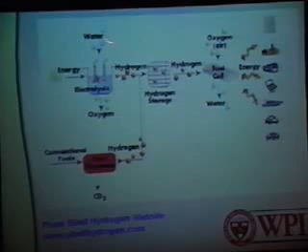This development will be through technology and innovation, and he will provide some funding for doing that. Now, hydrogen, as Provost Durgin said, well, it's easy: you take water, put energy in, and you get hydrogen and oxygen, then you store the hydrogen and go to a fuel cell for energy. However, this is really a difficult 'easy' thing to do, and it's very expensive.

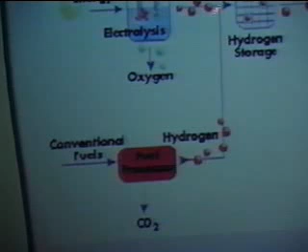Currently, all hydrogen is produced through fossil fuel. So if we talk about the current hydrogen economy, we still cannot get rid of the greenhouse CO2 problem. Let's spend a little more time talking about this fuel processor to make hydrogen. Once you make the hydrogen, you can store it — that's another big problem, how you store hydrogen — or you can feed it directly to the fuel cell to generate energy.

When you go to the hydrogen economy, now you have no carbon. As Provost Durgin said, you combine hydrogen with oxygen to give you water. That's the byproduct of your energy — this is really an environmentally benign product.

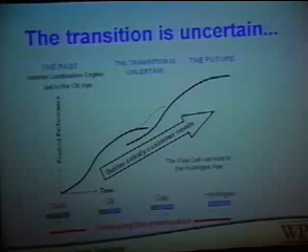Currently we are in this transition stage, and the transition is very uncertain, simply because we have to find a good way to make hydrogen — an economic way and also an efficient way to do that. Let's look at the next slide.

If you look at water, the best way to do that is to take solar energy to do electrolysis of water — that's the best way. But that's really a long way to go. In this case the hydrogen to carbon ratio is 1:0. There was also a suggestion to use nuclear energy for electrolysis of water, but as we all know, there are other problems associated with that. Again, this is the best way to do it, but it's not the most economic way, and it doesn't produce any greenhouse effect.

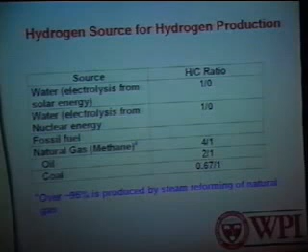Now the next thing is fossil fuel. Natural gas, as I said before, is 4:1. Currently, most hydrogen used in the chemical or petrochemical industry is produced through natural gas, what we call steam reforming of natural gas, and I'll talk a little more about that in a few minutes.

This reaction is actually the trouble for the whole system, because it's generally controlled by thermodynamic equilibrium. So no matter what you do, at one temperature you can only convert a certain amount of methane because of that equilibrium. What we want to do is increase the conversion — what people used to call shifting the equilibrium. Thermodynamics itself can't be shifted, but you can increase the conversion by doing certain things, and that's what we're going to talk about next.

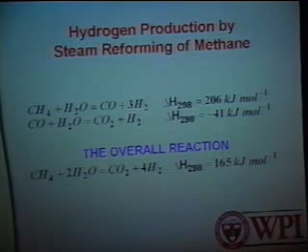Now what we are doing at WPI is using a certain membrane we developed which can be used to make this hydrogen. We call it the membrane reactor, where we replace this whole 5-unit operation with a single reformer. This means you save all this process here, and equipment-wise you are cheaper, and also operation-wise you have less units to worry about, so it becomes a more economical and efficient way of doing it.

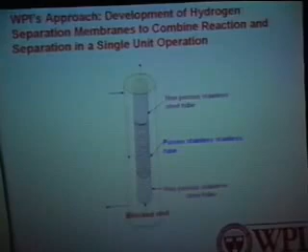So what is a membrane? Some of you may not be familiar with membranes. Here I have the membrane for you to see, and this is two of them. This one is what we call support, and we put our membrane on this support here, and this one has a membrane inside. When we finish, if you want to come up to look at that, you're welcome to come out and look.

If you look at that, this is the tube I show here. This end is a non-porous stainless steel tube, and that's also a non-porous stainless steel tube. In the middle portion is porous stainless steel. In simple terms, the stainless steel tube in the middle is porous like a sponge.

Now outside the sponge, we're going to put a layer on top of that. We put a palladium or palladium alloy membrane, and I'll explain why we put that on.

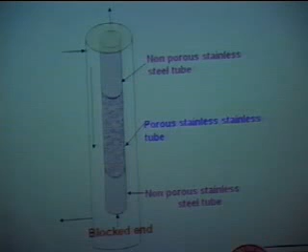Now in this unit here, generally what you do is have a gas mixture come in here, and gas mixture goes out here, and hydrogen goes out here. So what happens is you have the mixture of gas coming in, hydrogen going through here. This membrane only allows hydrogen to go through, so pure hydrogen goes through here and out here. You can collect that, go to storage, or go direct to a fuel cell.

Now that's a very simple process. At the end, I'll show you a comparison between this process versus currently commercially available units.

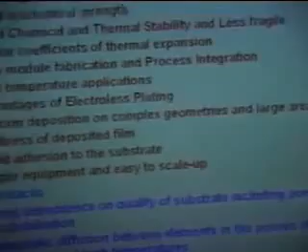Well, what we do here is look at that. We say, we're going to put a very thin palladium or palladium alloy on here. And we use the advantage of a metal support, which means it's very easy to connect to different parts of the process. And also they have very good mechanical strength, of course chemical and thermal stability, and are not very fragile.

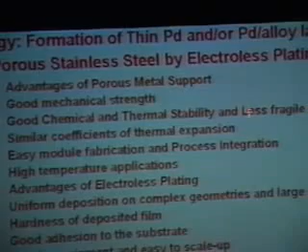And because you have two metals put together, when you run these reactions at very high temperature, you need a similar coefficient of thermal expansion. And we can easily form the module and easily integrate it into the process.

We do electroless plating. What is electroless plating? We all know electroplating, where you pass electricity to place some elements on top of a support or surface. Electroless plating is where we do not use any electricity to plate. Sometimes it's called chemical plating. What it means is we use certain kinds of chemicals. We activate the surface first, and then we seed some of the nuclei on the surface, and then we carry out the reaction, which becomes autocatalytic. The reaction takes place by itself and coats the material.

That, again, is really easy to do, and we can coat it very uniformly. When you look at the sample, you can see that. And the film we produce is very hard and also has very good adhesion between the coated film and the support here. And it's very simple equipment for doing that.

Here's the process we do, I'm not going to go through all of it, just to show you this process. We have to clean the surface, sensitize the surface, seed some nuclei, and then plate it. We have to do it several times to get the membrane we need.

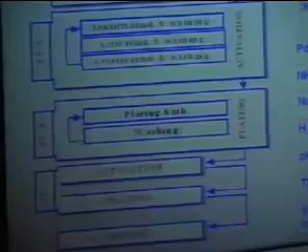The important part is this one, the unique pattern in this procedure. Because we are making two metals contact together, at high temperature when two metals get together, one metal will diffuse into the other. So to avoid that, we create a layer as a diffusion barrier, so the metal elements will not go into the membrane and deteriorate it. This is a unique process.

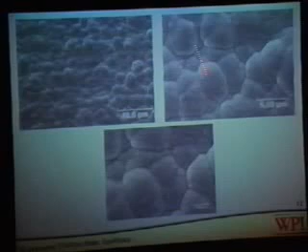If we look at this, this is the surface of the membrane, this is the support, and this is the palladium on the surface here. This is the cross-section of the membrane. If you look at the next one, you see the surface of the membrane - these are clusters of palladium at different magnifications. At the highest magnification, you see clusters, and also inside the cluster are small grains. Hydrogen will diffuse through these layers of metal.

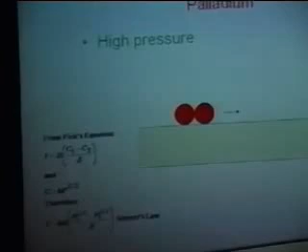Here I'll show you that. This is the palladium membrane I showed before. We have the high pressure side here, low pressure side here. When hydrogen comes over, it comes to the surface and decomposes, dissociating into two atoms. Hydrogen molecules come to the surface, dissociate into two atoms, move through the palladium layer, go to the other side of the membrane, recombine into hydrogen molecules, and then desorb from the membrane. This is the process taking place.

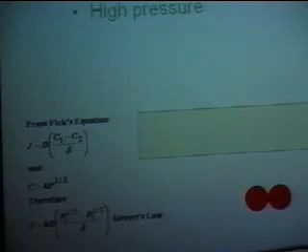When you have hydrogen, it will adsorb on the surface, dissociate on the surface, go through this membrane, and reassociate to give you hydrogen gas here.

Now if you go through the analysis, you get what we call the flux, essentially how much hydrogen can go through per unit area of the membrane. It's proportional to the difference of the square roots of the pressures, and inversely proportional to the thickness of the membrane. So we want to make the membrane as thin as possible, but still dense, so it will not allow any other gas to go through.

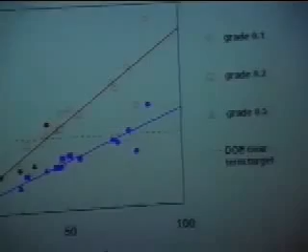This is DOE's near-term target. Our technology right now already exceeds the current DOE near-term target. That's why this technology is quite unique - that's what Provost Durgin mentioned. It's very unique in the sense that we can satisfy, in fact exceed, the DOE near-term target for hydrogen production.

Now just to show you pictures, we can make a small one like this, about 10 inches, about 1 inch diameter, and this one about 12 inches. The next one we'll show you is this one.

You can see these are two of my associates - they all have to be 6 feet tall or so because it's so long here. And one of my friends said it's not that the membrane is long, it's that Professor Ma is short.

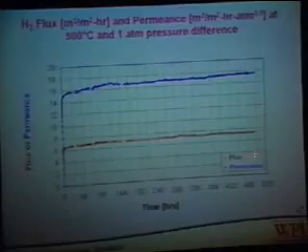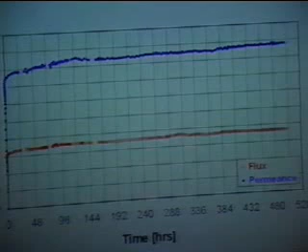One of the things we have to worry about is how stable this type of membrane is under high temperature. Here we show one of the membranes we made - the flux here as a function of time, you can see this is about 500 hours. We ran that for 500 hours. Certain membranes we run over several thousand hours, because industrially you need at least a year or two of life to make it industrially applicable - simply, you need that to make it an economical process.

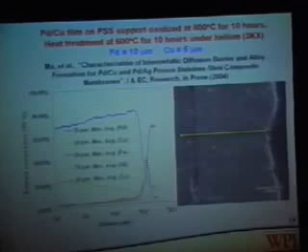Now, as I said, we look at this type of membrane. I'll show you one more - alloy membranes, this is palladium and copper alloy. Why palladium and copper? Certain fossil fuels contain sulfur, and sulfur is not very good for palladium, but palladium-copper alloy can resist the sulfur. So we also make this type of membrane, as you can see.

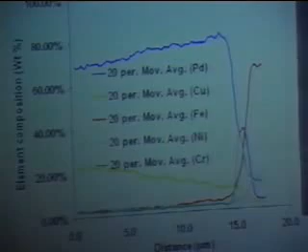We also need to be concerned about, as I said before, intermetallic diffusion - in other words, material elements in the support diffusing into the membrane itself. We have EDX data showing there's no element from the support going into the membrane, which means that this barrier layer we made, or the patent we hold on the barrier layer, is effective in avoiding this type of problem.

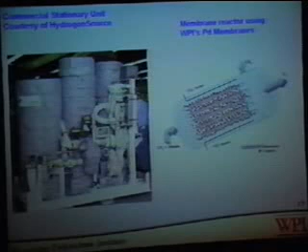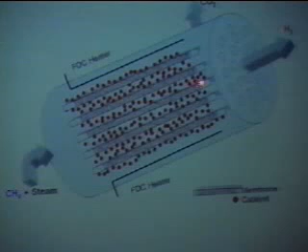Now that's what I want to show you - this is what we envision as our reformer. This reformer has the membrane tube I described before, and these are catalysts. The steam reforming process needs a catalytic reaction taking place. So if you have methane and steam passing through here, and this is a heater.

The heater here is called a flameless distributed combustion. We have a very extensive program with Shell Exploration and Production International, Inc. Shell International, part of Shell Hydrogen, has developed a technology where you can directly put heat into the system, because this type of reaction requires high temperature, 500 degrees or above, and it's very difficult to put the heat in.

If you put the heat from outside, then you have to heat very hot so that the material for construction of these units becomes very expensive. By doing this type of heating, you directly go into the system, and the surface temperature now is around 600 degrees centigrade rather than, say, 1,000 degrees or over.

Now if you look at the methane and steam going in here, the CO2 goes out here, and hydrogen comes out here. One of the advantages of this system is that this reaction is run at high pressure, so the CO2 stays here - this is high pressure CO2.

Now here I have a unit from Hydrogen Source. This is a 5 kilowatt unit of produced hydrogen, enough for a 5 kilowatt fuel cell. If you look at that - 1, 2, 3, and one more, 4. In this process they use catalytic partial oxidation units.

So they have 4 units here, but this one does not produce pure hydrogen, so they don't have a separator - you have 5 units here. If you use this one, then all you need is this one unit to replace 1, 2, 3, 4 here. So that's really the advantage of this process we're talking about - you can do it with a simple unit.

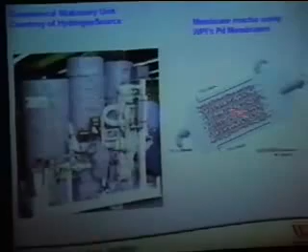And also at the same time you get the benefit of being able to put the CO2 away, and you come out with hydrogen almost 99 to 99.9% purity. So this is the process we're talking about, and we hope it will be available in the near future.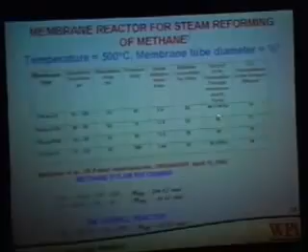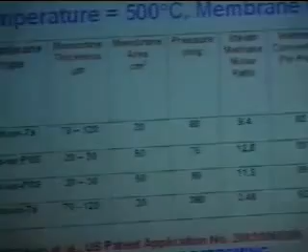Now here's some data run by Shell, from one of their patent applications, using our membrane, showing how high the conversion and how high the purity of hydrogen you can get. At 500 degrees, you can convert 93 to 99% of methane, which means the conversion itself is very, very high here. Again, that's the steam reforming reaction.

Now let me conclude my presentation. Electrolysis of water certainly is the cleanest way for hydrogen production; however, technical and economical challenges remain to be resolved. The transition from fossil fuel to hydrogen economy is uncertain, and considerable R&D is still required, including development of palladium membrane reactors for more efficient, economical hydrogen production with simultaneous CO2 sequestration.

Now that's the important part of this process. Not only can we produce pure hydrogen, at the same time we can solve part of the CO2 problem. I say part of it because we still produce CO2, but we have a relatively easier way to put the CO2 away. So this will provide a cleaner way for near-term hydrogen production.

I believe conservation is probably one of the best ways to solve our long-term energy problems, to make us self-sufficient, and to keep our environment clean.

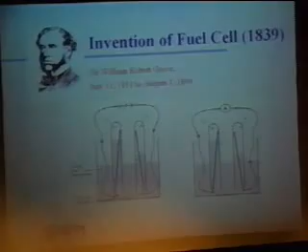If someone can turn on the light at that table, as I go along, I'm going to give a very basic introduction to fuel cells. I'm not going to go into a lot of technical details, but I do want to show those of you who are uninitiated in fuel cells how it works. So the first thing I'm going to demonstrate is electrolysis.

Here is a beaker in which there are two electrodes, and these electrodes, I don't know if you can see them or not, but these foils are platinum. What I'm going to do is, it's already connected to a cell, and I'm going to put some water in this to see if there is any electrolysis.

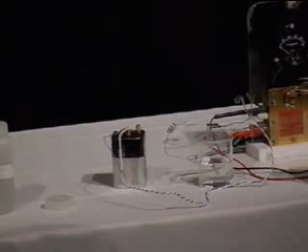Well, I don't know if you can see or not, but you see that there are no bubbles. So what do you think is missing in this? Electrolyte, yeah, that's exactly right. What is missing is that you need an electrolyte, and in this case there's a very dilute sulfuric acid solution, which I'm going to add to it to see if the electrolysis begins. Nothing.

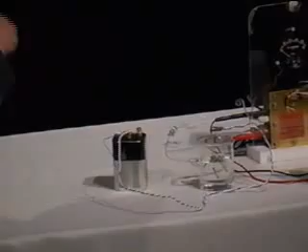So I've added a little bit of sulfuric acid, and I don't know if you can see the electrodes, but you can see the bubbles. I think that illustrates the basic ingredients of a fuel cell. You need two electrodes, an anode and a cathode. This is actually just the reverse process of a fuel cell — you're using electricity to produce hydrogen and oxygen, whereas in a fuel cell you use the reverse process. You might be able to see there are bubbles of hydrogen and oxygen on the electrodes.

I'll fast forward to the modern fuel cell. In the modern fuel cell, you have an electrolyte, which is the membrane, so there is no liquid electrolyte. This whole thing is a solid state device, and I'll show you an example of that in a minute. The hydrogen comes in — this is the hydrogen molecule that comes in. There is platinum dispersed on the surface of the membrane in a very, very distributed form, so that you can utilize the platinum very effectively.

The hydrogen molecule breaks up into hydrogen atoms, and it strips off the electron because the electrolyte does not allow the electrons to go through. The electrons are forbidden to go through the membrane, so they go through the external circuit where they perform some useful work. They arrive at the cathode, where they meet up with oxygen. The oxygen molecule also dissociates into oxygen atoms, and it combines with two hydrogen atoms and two electrons to form water. So water is the only product.

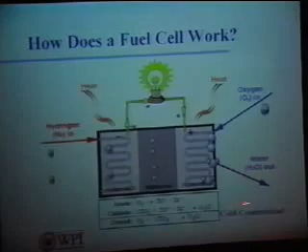So this is the reaction that goes on at the anode, where a hydrogen molecule forms two protons and two electrons. And at the cathode, you have half a molecule of oxygen combining with two protons that come through and two electrons that come through the outer circuit to form water.

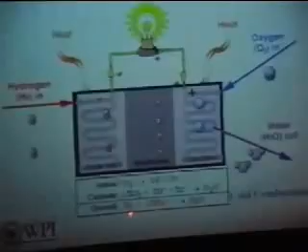So if you look at the overall reaction, which is just the combustion of hydrogen, because this happens at a low temperature, around 80 degrees or so, it's called cold combustion, because the overall reaction is the same as combustion, and I'll give you another demonstration of that. You combine hydrogen and oxygen and you form water, but you don't do it at high temperature.

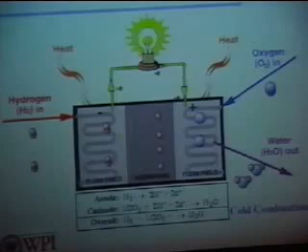Let me just show you the second part of the demonstration. So I have here a tank of hydrogen, compressed hydrogen, and a tank of oxygen. You don't need a tank of oxygen, you can use air. What I'm going to do is, I've already opened the valves and I've been bypassing it, so I'm going to mix the two, and it's going to come out of this nozzle here.

To show that there is a gas flow, I will. There's a soap solution here that makes a bubble. Can you see the bubble? Now I'd like you to look at the bubble. It has hydrogen and oxygen in stoichiometric proportion, but nothing is happening. It's not combining to form water.

So what is missing? We saw in this example that what was missing was the electrolyte. What's missing in this case? Activation, yeah. So you require some energy to activate it, and that energy can be provided either as a spark or as a catalyst. The catalyst does not provide the energy, but it lowers the activation energy.

So let's see what happens when I use a catalyst. I'm going to make another bubble.

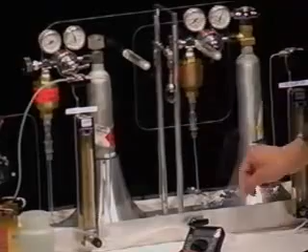Now here is platinum catalyst. It's not a foil, it's dispersed. It's platinum black, so it's a powder of platinum. There is $100 worth of platinum here, so I want to be careful. But what I'll do is take a Q-tip and pick up some platinum powder, and apply it to this bubble. So you see that. That's the other ingredient that was missing, the catalyst.

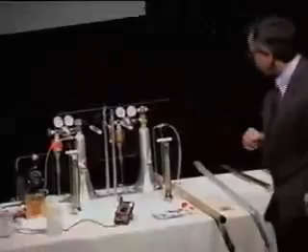I'm going to shut this off. Actually, I have another part of it. Before I go on, so we saw in this that you need an electrolyte, you need platinum, and of course the platinum is extremely expensive, and you want to disperse it as finely as you can. That is one of the things that chemical engineers have accomplished, that we can disperse this catalyst in such a fine way that you use very little of it. An example of that is the catalytic converter in an automobile that costs only a couple hundred dollars, but it's based on platinum, and so it has very little platinum in it.

Now the second part of this demonstration is the fuel cell. The fuel cell, there's a single cell, just like a AA battery, but it looks like this. I don't know if you can see this very well or not. This is the membrane, the clear plastic part that looks like a transparency, and these are the electrodes. Between the electrode and the membrane is a very fine layer of platinum, which is the catalyst. What you do is put it in the hardware so that you flow hydrogen on one side and oxygen on the other, and it begins to produce current.

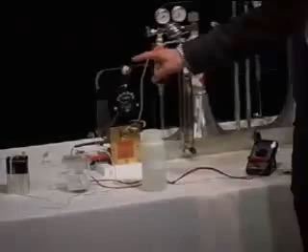So because it's a single cell, it produces less than a volt. All it can do is power this toy motor. So you watch this needle, if you can, as I turn the hydrogen on towards the fuel cell. It's as simple as that. You turn on hydrogen and it begins to produce electricity. And I haven't even turned on oxygen yet. It stopped for some reason.

And if you could read the current, it's roughly 100 milliamps and about 0.8 volts. Now, what is impressive about this is not the voltage, which is, of course, like a single cell, but the current. This little device with the active area of 5 centimeters square can produce up to 5 amps of current. And so it has a very high energy density, and that's one of the attractive things about fuel cells.

So this is all it is. This is the heart of the fuel cell. And this is a single cell. What you can do is stack this together and produce any voltage or any current density that you want. I'm going to turn this off, but you'll see that this is going to continue to turn so long as there is some hydrogen in the lines. At the end of the presentation I'm going to turn this off, but let me go back to the rest of my slides.

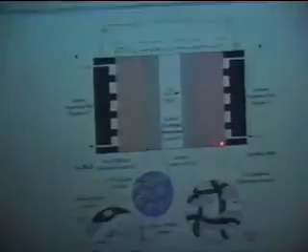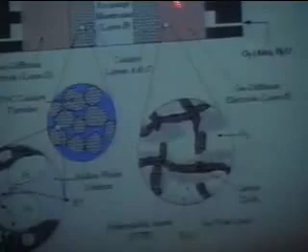This is the membrane, the thin plastic that I showed you. This is the catalyst layer, and that's the electrode. Because you're producing water here and you want oxygen to go through, you want the water to ooze out quickly. You don't want water to block this electrode. So you make it hydrophobic with Teflon so that oxygen can go through. But you're also collecting current, so this electrode is made from carbon cloth.

The catalyst is dispersed as 5 to 10 nanometer particles on carbon, and you have Nafion solution. This is Nafion, this membrane. The protons produced here must find their way here, so there is Nafion solution here as well, shown here. But you also need hydrogen to get to the platinum catalyst. This is the carbon particle support, and you have some Teflon here as well to make it somewhat hydrophobic. So the construction is really quite sophisticated.

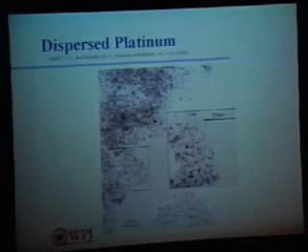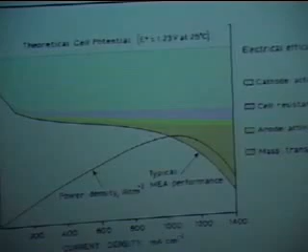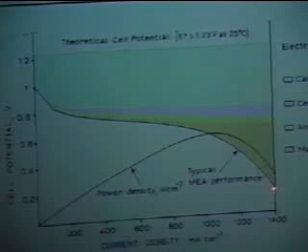The typical performance curve: as I said, the open circuit voltage is roughly 1 volt. In fact, the thermodynamic voltage is in excess of 1.2 volts, but the oxygen reaction is so inefficient that there's a large voltage drop here. This is the current density in milliamps per centimeter square. You can easily go up to 1 amp per centimeter square at a voltage of roughly 0.7 volts. So the largest efficiency drop is at the cathode, but there is also resistance of the cell and the anode reaction. The overall performance characteristic of voltage versus current density is given by this curve.

If you multiply the voltage by the current density, you get the power density curve, and you can see it has a power density of roughly 600 milliwatts per centimeter square for that device I showed you.

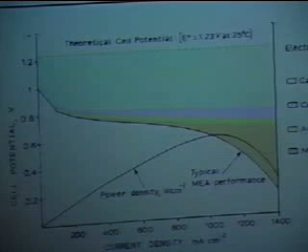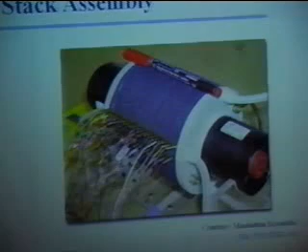This is an example of a stack assembly - a 600 watt cell by Manhattan Scientific. So what you do is stack all those single cells together. You can produce any voltage you want, and depending upon the area - this is circular in design - depending on the cross-sectional area, you can produce any current that you want.

I'll briefly go over some of the applications. The earliest application was in space.

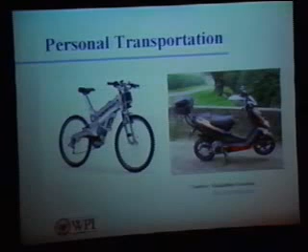For personal transportation, from Manhattan Scientific, these pictures show a fuel cell powered bike and a scooter. I think this is 600 watts. This is about a 3 kilowatt fuel cell. These are all prototypes. You can't buy them.

I'm sure you've heard of the Segway, and the latest model is driven by a 700 watt fuel cell. Incidentally, I'm not sure if you know, this is developed by Dean Kamen, who went to WPI.

Before we get to the hydrogen economy, the only practical fuel you have is gasoline, so the thing has to run on gasoline. What is done is this reformer converts gasoline: you drive up to the pump, fill up on gasoline, and this converts it on board into hydrogen that would be used in fuel cells under the hood.

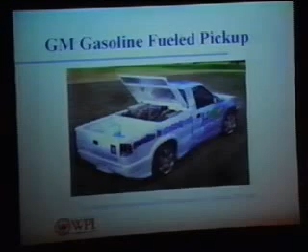So again, the problem is the size and the complexity of the plant for producing hydrogen. And the technology that Professor Ma is developing at WPI, of course, is very promising in this respect.

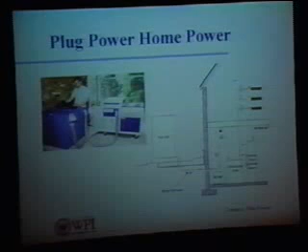There are also potential applications for the home, in which the fuel cell is located outside and you produce your own electricity, using the waste heat as well. I should have mentioned in the slide that showed efficiency that it's typically about 50%, so the rest is heat that you can use for boilers and for heating your home.

Let me quickly describe some of the challenges. The fuel cell technology has been a long time coming. As I mentioned, the concept was developed a very long time ago, but it's only now that they're becoming cost and performance effective. Even now, there are plenty of challenges we are working on.

For example, the fuel cell I showed you has an operating temperature limit - you can't go above 80 degrees. The reason is that the membrane conducts protons only when it is soaking in water. If you go above 80 degrees, it dries up and won't conduct protons. So even though it's nominally a solid electrolyte in the sense that you don't have a liquid, you need water in the membrane - you need 100% relative humidity.

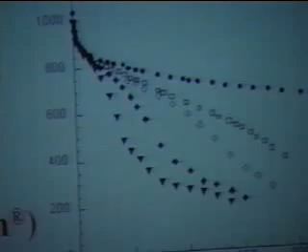Again, it's not the fuel cell itself that is the problem - or I guess it is a problem in the sense that it is not carbon monoxide tolerant - but you need pure hydrogen.

I also mentioned the fact that the cathode is very inefficient and accounts for the largest efficiency drop. You still need high platinum loading. If you want to use it in automobiles, you need to be able to produce a 75 kilowatt plant for $3,000 to compete with the internal combustion engine, so you still need to reduce the platinum loading a little further. The Nafion membrane is expensive, and there are a number of other issues that need to be worked on.

Some of the challenges for hydrogen production, Professor Ma has already alluded to, so I won't go into a lot of detail. But the large size, the weight, and the cumbersome process are some of the challenges.

A PEM fuel cell is made of a catalyst-coated membrane between two plates. Hydrogen is fed on one side, oxygen on the other. The hydrogen splits into a proton, which goes through the membrane, and an electron, which is captured as useful electricity. The proton and the electron combine with the oxygen, generating water and heat. A fuel cell will operate continuously as long as fuel is supplied. Thank you.

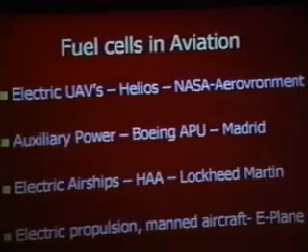In the course of doing this, we looked first at all the different applications, and these are some of the programs underway. There's an electric unmanned vehicle called the Helios that NASA funded, developed by AeroVironment, that actually flew to 96,000 feet on solar power. When we put the fuel cells on, unfortunately we only got it to about 3,000 feet before we ran into some problems—it kind of broke apart. That project, though, really has led to a lot of interesting areas, and we'll talk about those more in a second.

Boeing over in Madrid is looking at using fuel cells for the auxiliary power on board a jet. This is because when you sit on the ground, the auxiliary power turbine is running all the time, and in many cases running all the time that you're flying, in addition to the propulsion jets. But that generates a lot of fumes and other issues in terms of waste heat and so on, so that's a big application. That aircraft is actually going to be coming over to the U.S. sometime in May, and we're going to put some of our drive systems in it that we're developing at WPI and complete the project.

Electric airships are another area, and high-altitude airships have some very interesting attributes, particularly if we can get them to stay aloft perpetually, keep them on target, and provide enough power to run communications and other things as a replacement for a low Earth orbit satellite.

And then electric-propelled aircraft, which is what we're going to talk primarily about tonight, is the ultimate challenge: to have a manned aircraft that runs totally on fuel cell power. This is the Helios we mentioned, with a 247-foot wingspan, powered by 14 electric motors, each producing about 3 kilowatts of power. That wing is so flexible it can almost bend all the way up and touch the two wingtips.

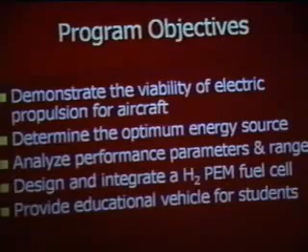And a lot of this work is being done by students all over the world, a lot of which are right at WPI, even with local schools.

As we alluded to earlier, electric airplanes offer a lot of significant benefits. In terms of reliability, we only have one moving part, the propeller, coupled directly to the armature of the motor. Electric motors offer a lot of benefits, particularly very high efficiency. The electric motor we're using in this aircraft is over 90% efficient, including the losses of the controller.

It's also a lot safer, and much quieter because we only have propeller noise, which is still significant, but we can spin the propeller at a lower RPM because we produce a lot more torque. The comfort and maintenance issues are important to the pilot and passengers. The biggest benefit of all is we have no emissions, and the only byproduct we produce is water vapor.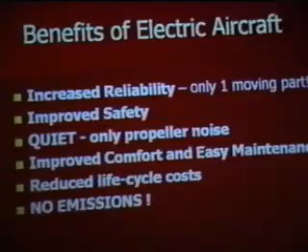The participants in the project are quite a group of people, and I won't read them all off, but all the components on this project have been donated by various companies involved because it's such a breakthrough program. We have a lot of labor and assistance being donated by volunteers, students, and even some professors and test pilots.

How many pilots are in the audience here? Do we have any pilots here? I know we got at least one or two. Well, the two in the front row have already signed up. But any others of you that are certified test pilots, come see me later.

Our goal in the project is to fly initially all electric, just on nickel metal hydride batteries, to prove out the electric drive system and the controls, and be sure everything is working properly before we introduce the other issues of adding the fuel cell. That's going to be a fairly short range, and you'll see why in a minute. We hope to do that this spring.

Then we're going to add a fuel cell into the system later in the year that will provide just enough power to cruise the airplane, about 20 kilowatts of energy. With this particular airplane, this will provide a cruise of about 80 to 90 miles an hour. Although the plane will do over 200 miles an hour, that takes quite a bit more power.

We hope to fly that at the end of the year, and that'll give us a range of at least 200 miles. Then we're going to expand the system and put a higher powered automotive type fuel cell in that'll produce about 75 kilowatts, and with some enhancements in the hydrogen storage system, that'll give us a range of over 500 miles. So this is what's involved in the system.

All the basic components, as you can see, it's pretty straightforward and pretty simple. The motor is a brushless DC motor, weighing about 80 pounds, coupled to a variable pitch propeller made in New Zealand that is a very high efficiency propeller that also gives us the ability to match the torque load of the motor to whatever requirements we have for climb out or cruise.

The rest of the components are pretty straightforward. The batteries we're using now are nickel metal hydride batteries that came out of my Toyota Prius, which I was a little upset when I came in one day and discovered the students had taken those out, but they were pretty anxious to get the plane flying. Actually the batteries have worked out pretty good, though.

Then the fuel cell is a custom system using a whole new concept where we got rid of the bipolar plates to get the weight down and improve the efficiency. We have a very large cross-sectional area. Unfortunately, there's a lot of proprietary aspects of that, so I can't show you too much more about that until the patent work is finished.

But we're basically using oxygen that we take directly out of the air, and because this is so efficient, we don't need a normal compressor, which normally consumes a lot of your power from your fuel cell, just to get enough air in and enough pressure to cover the pressure drop across the stack. But we are using high-pressure hydrogen already in a tank at about 5,000 psi in a special composite tank.

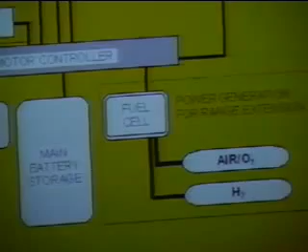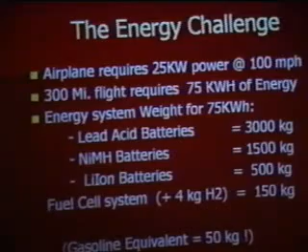The real challenge we have to make this effective is energy. We can cruise along nicely on only 25 kilowatts of power, which converts at 746 watts per horsepower to somewhere in the 35 horsepower area. So if we're going to fly 300 miles, which is kind of an average trip for a small plane, we're going to need 75 kilowatt hours of energy.

If we were to use batteries to produce that energy, with lead-acid batteries it would take 3,000 kilograms, which would keep our little plane well planted on the runway. With nickel metal hydride batteries, twice the energy density of lead acid, it would still require 1,500 kilograms - that's why our range is only 25 miles with about 300 pounds of batteries. And with lithium-ion batteries, our most advanced today, it would still take 500 kilograms to fly 300 miles.

So that's why you haven't seen too many electric-powered airplanes. Now with the fuel cell system, we have a very high energy density for several reasons. Number one, the conversion efficiency of fuel cells is over 60%, where a typical internal combustion engine is about 20%. We also have the ability today to make lighter and lighter stacks.

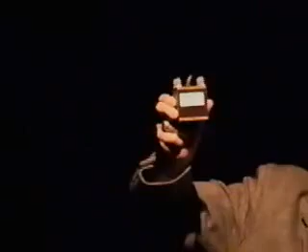Matter of fact, I happen to have here - this is one of the most advanced fuel cells available today, a 100-watt proton-exchange membrane stack that produces 12 volts of power at about 8 to 10 amps. This is being designed, I hope we can say, for some military applications at this point.

But the ironic thing here is that the balance of plant, the other components required to operate this, are actually bigger than the stack. The cooling system, the heat exchange system, and the support system for getting air in there - the blowers and so on - are actually bigger than the stack. This only weighs about 7 or 8 ounces. So this is kind of the state of the art, and it's actually being developed right here in Massachusetts by Protonex Corporation out in the Southborough area.

Just to compare, even the bottom line, we're doing very good on overall energy density and weight with a 150 kilogram total system. And the plane has that's just about what our allowance is.

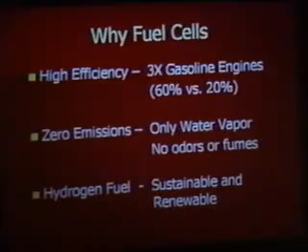Again, the only byproduct we have is water vapor - there's no odors or fumes. And hydrogen fuel - most people think we use it up, but ironically it's totally sustainable. We get all the hydrogen back as water. Unlike gasoline, when you burn a gallon of gas in your car, you produce all kinds of byproducts - nitrous oxide, carbon monoxide, carbon dioxide - but you can't put those back together and get a gallon of gas back. With hydrogen, it's totally sustainable and renewable. It's mainly an energy carrier, a way for us to move energy in and out of a system.

The same issues Ravi explained for fuel cells become even more compounded when you put them into an aircraft, because weight becomes a very critical issue, where in a terrestrial application, particularly residential and automobile, it's not as critical. The support components, particularly the efficiency of the balance of plant, the compressor in particular, can in many cases take up to 20% of the total energy output of your fuel cell just to run the blowers, the pumps, and the cooling loop.

Whatever we don't produce as energy comes out as heat. With your car, you're producing 80% heat, just like an incandescent light bulb makes a much better heater than a light source, but you've got all that extra heat to get rid of. In a fuel cell, we don't have a high temperature like you do with your exhaust, so we have what's called low-grade heat that we have to get rid of, which takes a little bit more work.

The other issues on safety and financial limitations have been a challenge because we're building basically a $1 million version of a $100,000 airplane. The same airplane, if you were to buy it and equip it with everything you'd want today, even a ballistic recovery parachute system, wouldn't cost more than $100,000. But fortunately NASA is funding about half the cost of the fuel cell development, and all the other components have been donated.

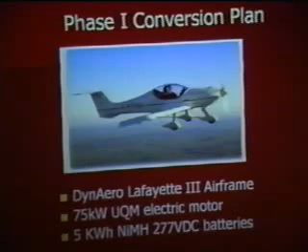The electric motor, though we don't need anywhere near that power, will produce a peak of 100 horsepower. Right now we have about 5 kilowatt hours of nickel metal hydride batteries producing a voltage of 277 volts, very similar to the bus voltage of the Toyota Prius, except we have about 3 to 4 times as many batteries for total energy.

These are the goals of our first flight, and probably the most important thing is that we make it around the pattern at the airport and get it back on the ground safely. Then we hope to use the airplane as an educational vehicle and take it all around the country and ultimately the world, to educate people on the benefits of moving into hydrogen-based fuel cell power systems.

We have 10 different teams at WPI that do the bulk of the work on the project, and each team has volunteers who help, some outside individuals, some actually WPI graduates as well. We have student coordinators, and each team works independently, but we get together periodically to check on the progress.

We have a lab at WPI in Higgins Laboratory for those of you who get over and visit, as well as a lab at Advanced Technology Products, which is the NASA contract grantee doing the fuel cell research, and also at the Worcester Airport.

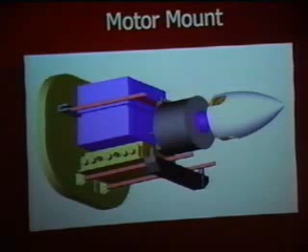And this is their raw initial sketch of what had to be accomplished to get two battery packs in the nose on top of the motor controller with the motor. The motor is about 11 inches in diameter and just under 9 inches deep, and that is connected directly to the propeller.

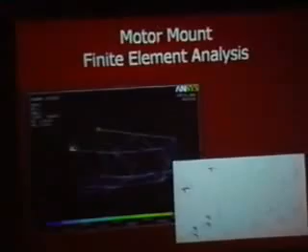They had to do a lot of analysis work for stress and loading to figure out how to use the minimum amount of steel, while making sure the strength was proper in all areas and could handle the torque loads. The electric motor actually produces more torque than the gasoline engine that otherwise would have powered the airplane. Unfortunately, you can't see a lot of the parts of the propeller adapter here.

The data acquisition system—the students have done an unbelievable job here. What we had to do is solve a problem with the FAA to show the pilot the amount of fuel remaining on board, and this is one of the requirements, that we also try to minimize the amount of switches and controls and elements that could distract the pilot.

So we had to come up with a way to show them how much energy was in each battery bank and the fuel cell system as well, and also the amount of time he had in his flight and the amount of time he might have remaining if everything went well.

We still have to provide a reserve for what we call a missed approach, which around the Worcester Airport sometimes is a deer on the runway. So we also have to be careful that the pilot doesn't accidentally hit the wrong button.

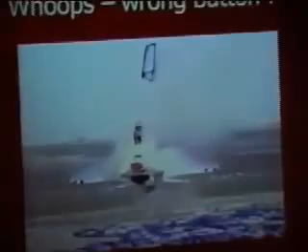One of the earlier Air Force tests proved this—those are actually the cars underneath of the bystanders there, and he's about 300 feet off the ground, and that didn't turn out to be the best move to make at that time.

So overall, what we're hoping to do is encourage more people to pursue careers in science and technology while educating the public on the benefits and the future of fuel cells.

Our test pilots hope to break records, and they're all cowboys. Hoot Gibson, our chief test pilot, was the head of the Top Gun school with the Navy out in California, and then went on to become an astronaut, flew 5 missions, and became the head of the NASA astronaut program.

Even while he was flying as an astronaut, he broke records by finding new ways to creatively take existing records, like the highest sustained horizontal flight, while taking the Russian astronauts to the Mir. So he's looking forward to breaking a lot of records, but we hope to have a lot of fun with this.

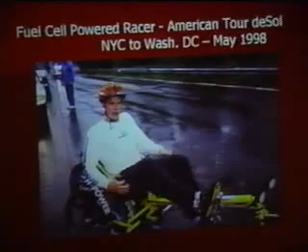Another project we had done earlier with some students was building the first fuel cell powered entry in the American Tour de Sol race with the Northeast Sustainable Energy Association. We hope to put another entry into that this year—a little neighborhood vehicle that Chrysler donated to us, like a real fancy golf cart.

I think the president is even using one of these now. It's a very nice little rig and fully covered, and we're going to put a 3 kilowatt fuel cell system on that over the next month.